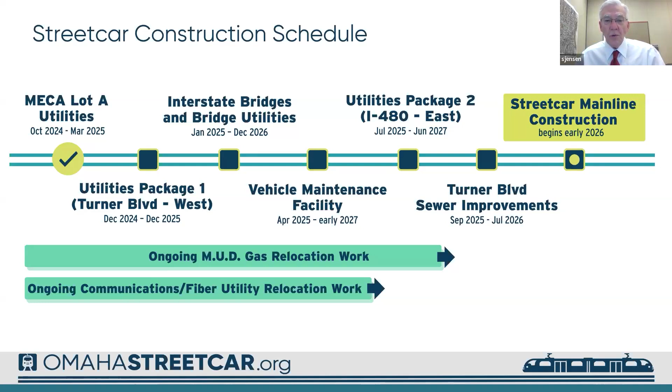The utilities east package, basically I-480 to 8th Street, work is beginning and scheduled for completion at the end of December in '26. The Turner Boulevard sewer improvement work is out to bid, with bids due back in August. Work is scheduled to run from late 2025 through '26. Mainline construction will begin in early '26 and run through '27. There's also ongoing MUD gas relocation work throughout this period, which should be wrapped up at the end of this year.

And ongoing communications and fiber utility relocation work is also underway and will continue through the rest of this year. So with that, I'm going to turn it over to Megan to discuss the MUD work. Thank you. Good afternoon, everyone.

The current MUD construction crew has completed work at 19th and Harney Street, and has returned to 14th Street, where they will continue installing the new main heading west towards 15th. New lane restrictions will be implemented in the area next week. MUD is also continuing efforts to work with customers to relocate gas meters to the exterior of buildings for safety purposes.

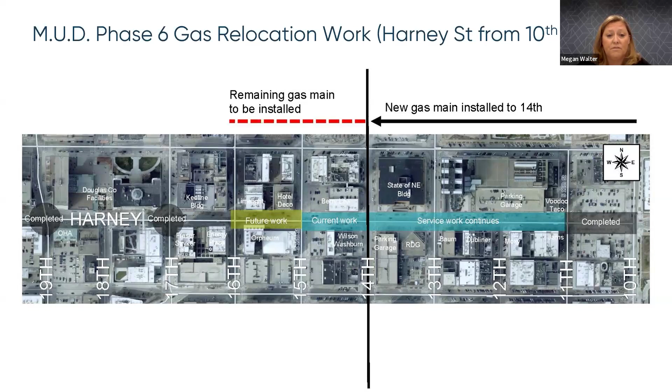MUD has recently added a second crew to support gas relocation efforts related to the streetcar project. This crew is currently working at 20th and Farnam, as shown on the project slide, labeled as A. A temporary gas shutdown will be necessary, and we will work with all impacted customers.

As of now, once work at 20th and Farnam is complete, the plan is for work to continue through the Phase 6 area, focusing primarily on work at various intersections, but that is subject to change. For safety reasons, pedestrians should use caution where holes have been dug, and vehicles should slow down in construction areas.

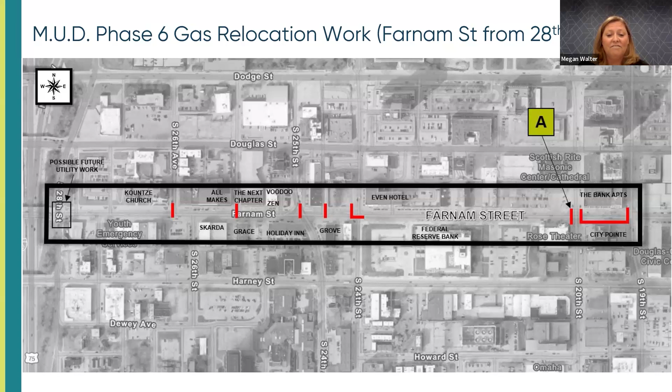If you come down to MECA Lot A for the CHI Center, there is its own access point there, but there's going to be a lot of construction down here because there are other sites going as well. VMF is on track to be ready to receive cars in early 2027.

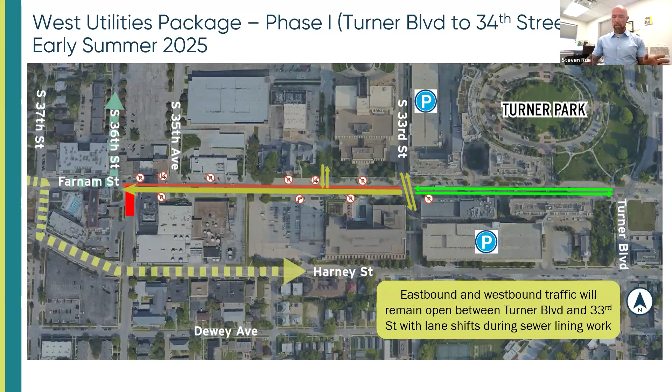So Phase 1, that's kind of where we're at. We have two-way traffic again, so we're going east and west from 33rd to Turner. Most of the on-street parking's been returned. You have access to all the parking garages. So we're really completing Phase 1 work there.

We can move on to Phase 2. So this is kind of the current active work area, this Phase 2 West Utilities package. Much like what we had in Phase 1, we have westbound only traffic through this area. Almost all, if not all, of the on-street parking at this time has now been eliminated as crews are using that as staging areas, work areas, etc. So there's no parking as indicated on this slide through this area here.

We do also have a closure of 36th Street, just south of Farnam. The north end of 36th between Harney and Farnam is fully closed right now as we're doing some connection work that needs to occur right there. Just be mindful of that. That's anticipated, I think, to go for another 3 weeks. So be mindful of that. We're showing the other detours to get you around down there.

So if you're trying to get to Cottonwood or back east, it's very similar to where we were at with phase one, just kind of looping around and through, but we have those detours shown on there.

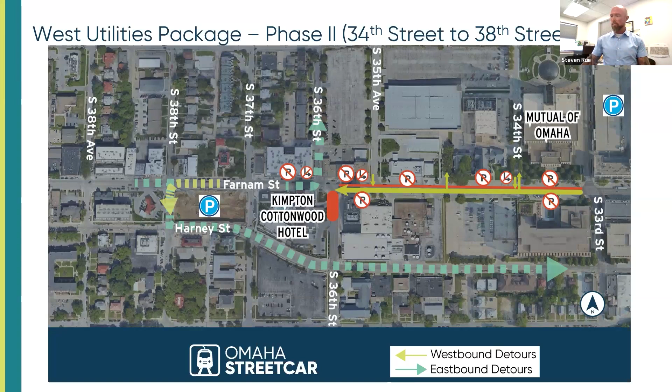Let's see, parking. Parking has been obviously a huge concern as we've gone through these multiple projects, so we wanted to highlight it again. In phase one, we still have those two big parking garages between Turner and 33rd, both open the whole time and still open. In phase two, we have the large parking garage between 37th and 38th, open right now with about 3,000 parking spots, so utilize that.

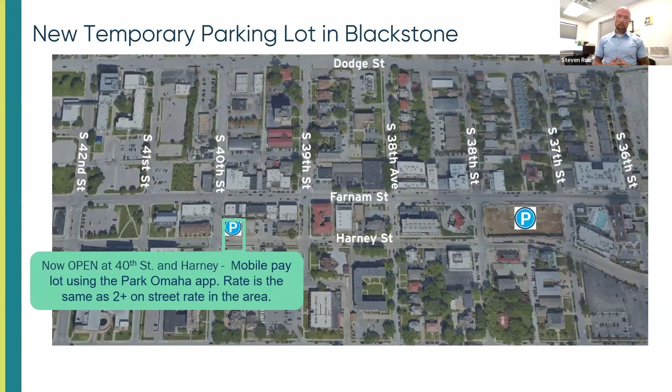And then we've constructed another one, probably more useful for phase three, but available now, a temporary lot just south of Farnam on 40th with about 30 spots. It's the on-street rate, so you get that rate if you park there. We're just trying to make sure parking options are available so you have access to the different activities still occurring through this area, like Jazz on the Green and the movies we'll talk about at the end. There's on-street parking on either end of the construction and the parking garages available, so make sure you're utilizing those if you're going down there.

Let's see, moving on to the bridges. The bridge work's going fantastic, schedule's going great, Hawkins is doing a great job.

Since the last webinar, the girders have been set and the grade beams, which is kind of a tie-in piece between what most people would consider the bridge and the street, have been constructed. We did some temporary lane restrictions overnight the last couple weeks to get the stay-in-place decking on, so if you drive by now it's looking more and more like what most people would recognize as a bridge. Those will be the forms we use when we go to actually pour the deck itself, so that's what those restrictions were for.

We completed the electrical duct bank work at 28th and Harney. We started a lot of the utility work at 29th and Harney. Obviously at 29th and Harney intersection there's a lot of work going on, so we're showing those closures that we have there.

There's a number of detours available. I'd personally suggest you just use your phone and type in where you're going. We do a very good job of keeping the map applications up to date, to the minute if possible, in the event of closures. Personally, if I'm trying to go west out of downtown, I like Farnam to 24th to St. Mary's. I know Steve Jensen likes to go up to Dodge and use those interchanges, but you have some different options. It is heavily restricted through there right now.

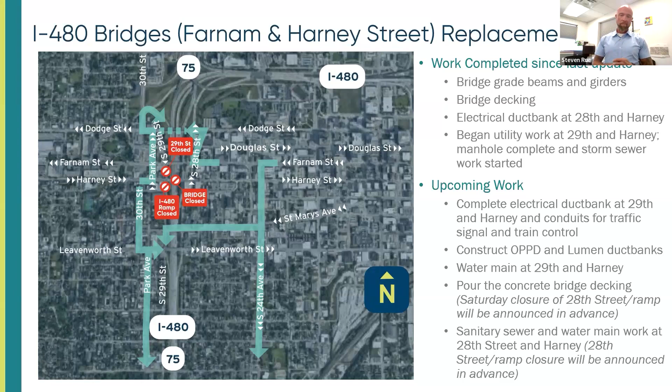For the general public's use, this is going to be somewhat similar to Utilities West, except that most of this area, except for 10th Street, will be part of that 2-way pair for Farnam and Harney. So the first work you'll see getting done is in and around the 10th to Capitol Ave to 8th Street to Farnam Loop, and then you'll also start to see work between 17th and 20th along Farnam and Harney.

Some additional work will be done in and around where MUD has some of their gas work going in, along with some duct bank work. We're going to get an overall master schedule for this. The work is supposed to be substantially complete by the end of next year, and we'll be working with Hawkins to get a bit more information out.

It probably won't be at the next webinar, but we hope to be able to start breaking it down into more detailed sections. We'll have some outreach in September to other stakeholders as well, and hope to present more detail then. But Hawkins will be getting out there—you'll see it again within the next few weeks around the east end of it.

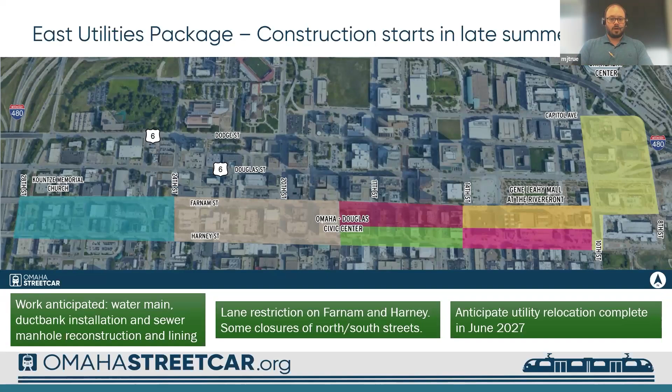All right, next will be Turner. We haven't gotten any bids back on yet, but this is now out there. This is a very deep manhole. Turner Boulevard used to be Turner Creek—if anyone's familiar with the Omaha area, think of Saddle Creek, which was also a creek that turned into this. So we've somewhat tried to contain nature.

There are several large sewers that connect in and around, particularly at Farnam and Turner Boulevard. The design work is complete. We're hoping to have construction begin real late Q3 or more likely into Q4, where you'll actually see them out there.

The total work from Farnam into Harney will be completed by the fall of 2026. The main work you'll see at the surface will be 2 large manholes, the bigger of the 2 at Farnam and Turner Boulevard, in that little pork chop diamond at the top, and then another one down at Harney.

Otherwise, the remainder of the work will be cured-in-place pipe sewer lining for the larger sewers that connect through here. We hope to have a better update in the next few months. We're supposed to receive bids in the early part of August. We probably won't have a full update ready by the next August webinar, but we hope by September to have a lot more detail.

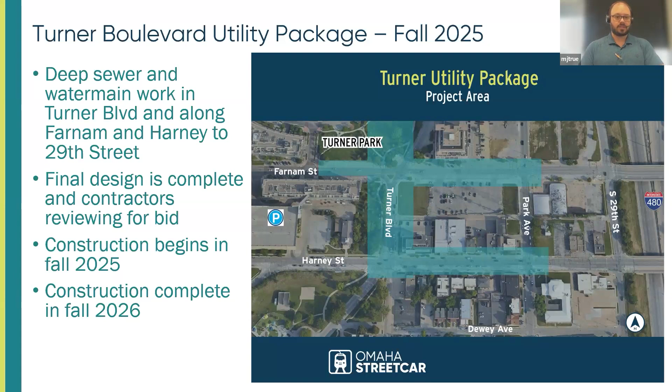And that will lead us to business support, and we'll turn that over to Steve Jensen.

Thanks, Mike. So with regard to business support, we've talked about this a little bit every month, but for those of you who are new, we understand all the difficulty caused by the construction. There are a number of things we are doing throughout this period that we've been doing during the Utilities West work, and we'll continue to do that as we move into the Utilities East work. Here's a quick list of the things we have in progress and that we're working on in that area.

From an overall communication standpoint, on the OSA website, omahastreetcar.org, you can find construction updates, an interactive map showing up-to-date information by area, and frequently asked questions and answers. We also have the weekly construction update email newsletter, so make sure you go online and sign up so you can get up-to-date information each week about what's happening with construction.

We also have these monthly construction update webinars. And Wendy Thompson, who you saw at the beginning of this presentation, is our contact in the corridor and is always available to answer questions if something comes up in between.

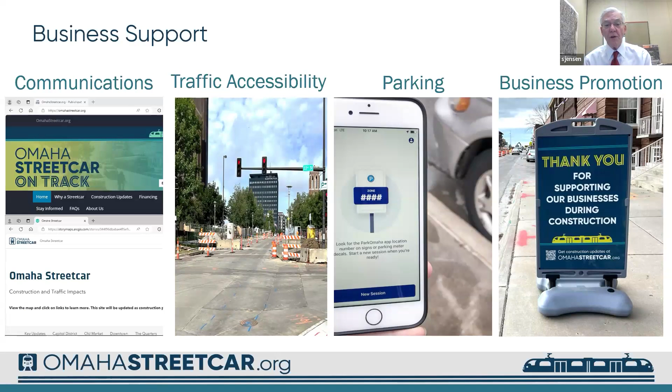The companies involved in the streetcar-related construction have sponsored 2 movie nights at Midtown Crossing. The first one was held in late June, and the second one is coming up on July 11th. We think that's an opportunity for people to get back to Midtown Crossing and begin to enjoy that wonderful venue.

From a business financial assistance standpoint, the Chamber has a business support loan fund initiative that's close to being finalized for those businesses west of Turner Boulevard. We've had a meeting with property owners and managers in that area, and the Chamber is finalizing that program, hoping to roll it out in early August. So there are a number of things that we are doing in the area.

And then from a communications standpoint, I'm going to turn it back over to Wendy to fill you in on all the construction communications.

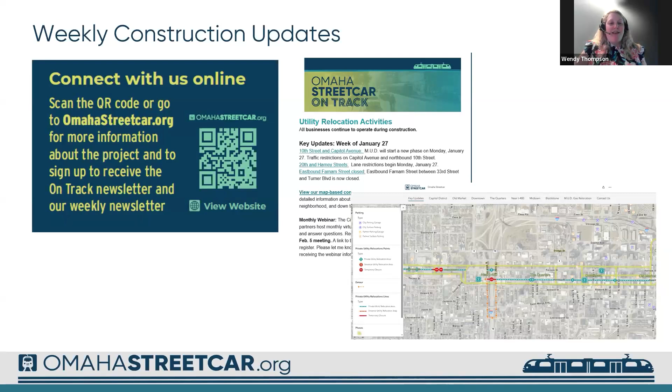Now let's begin the Q&A session with questions that were sent in but we haven't answered yet as we went through our presentation. Please continue to add questions about construction and traffic impacts to the Q&A box. So let's start with Mike True on the first question. When will the trees removed from Turner Park and along Farnam be replaced?

Depends upon exactly which trees. For Turner Park, there is a design charrette set up with both East Campus Realty, who runs Midtown Crossing, and also some of the other stakeholders in the area. We'll be going through what we want that canopy to look like, and we'll also be working with our Parks Department because they'll be taking over the responsibility for those trees.

We don't have an exact timeline on that yet. As far as the planting back of trees, that will occur after the mainline work has gone through. Some of those trees were removed because there was upcoming work in and around them that might be damaging the root ball, and we might actually have to go through the tree itself.

So at the end of mainline, which is Kiewit's work, which begins in January, when they wrap up, as part of their final wrap up for landscaping, we will include planting back any trees then.